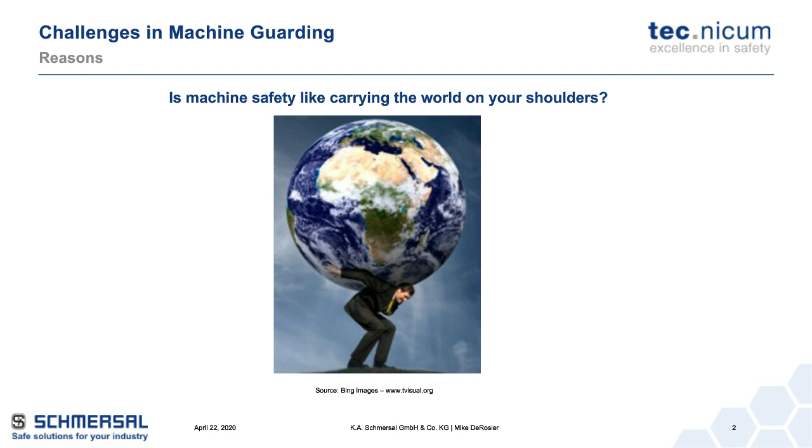I wanted to talk about each one of these, to really make that statement that ignorance is bliss. And I'm sure many of you have heard that just in life, ignorance is bliss. So if I don't know about it, then I don't need to do anything about it, because not knowing, there's nothing to do. I can plead ignorance. I didn't know any better.

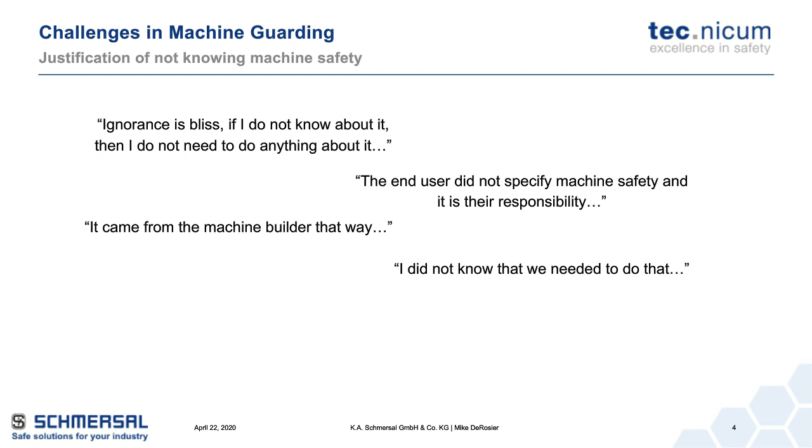And just because an end user may be quoting out a custom machine against 3 other manufacturers doesn't mean that you should forget machine safety in that scope of supply, so you're comparing apples to apples, for example. I didn't know we needed to do that. Well, again, it comes back down to the education. But ultimately what you find with all these, there are things that people say and come up with reasons why they haven't done machine guarding. But the bottom line is we need to protect people from serious harm and fatality.

That's easy to say. It's certainly not easy to do. So we can't justify not doing something on machine guarding just because we didn't know. We learn, we figure out what we can do, and find that balance between machine guarding and productivity.

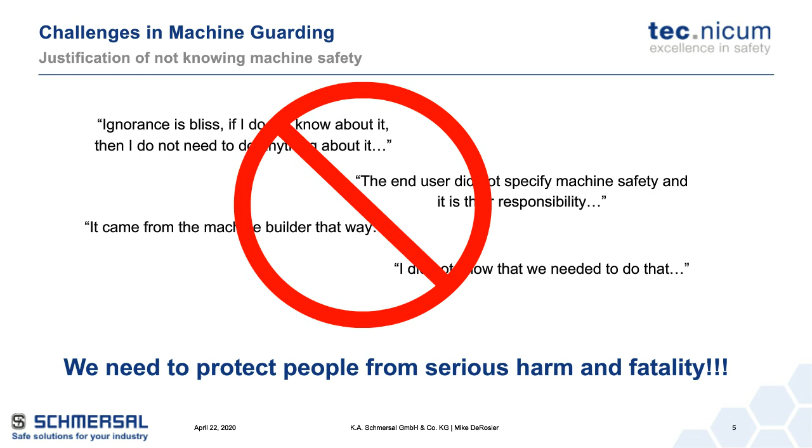Next one in that bullet points was the machine wasn't designed for safety. And this is real. This is what's out there. Whether a machine is 40 years old or 60 years old, there are machines out there that are still performing their job function as they did when they were originally designed. But way back when, the machine was designed purely for productivity and not for protection of people. It was done to put out a product or a process. As a result, machine safety never came into the consideration.

Just because it may still function doesn't make it safe for people to work around. So how do you actually develop guarding to work around that? It may be adding controls. It may be adding a standalone motor with safety controls. From there, you might be able to add guarding around that. You may be able to put light curtains.

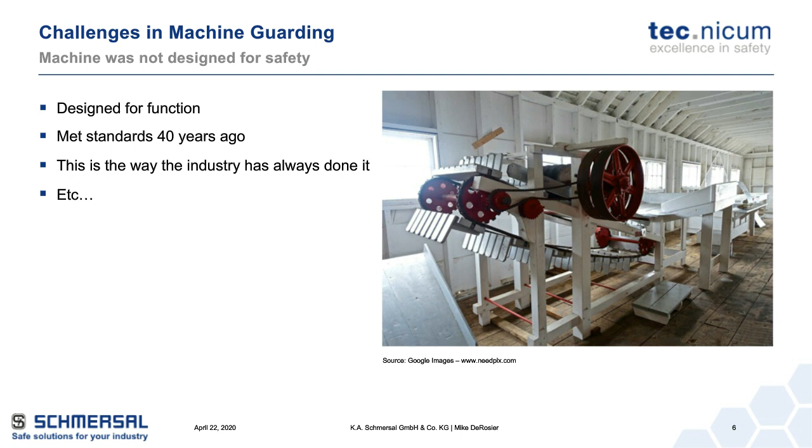But what does it really stem from? Goes back to that educational piece, that knowledge. Knowledge is power. But the fact that this is the way it's always been done becomes an acceptable practice doesn't come in as justification or reasons to not put guarding on a machine. If this machine can seriously hurt or kill somebody, we have to try to find a way to guard that. And again, easy to say, not easy to do. So we're going to go through those steps of what to do and how to do that after we go over some of the reasons that you see or hear.

Another big one is the lack of resources. Not having the personnel to be able to do that, not having your engineering, whether it be internal or external resources to be able to do this.

Somebody has to look at it. They have to come up with a concept. You have to look at risk assessment. What do you need to do? How do you need to go about doing it? How do you design it? Who's designing it? Are you fabricating it?

Are you using a fabrication shop, a sheet metal shop for a guard? Somebody does aluminum extrusion, wire, steel mesh fencing. Who's actually doing that? Who's responsible for it? Is it your own internal maintenance people? Well, maintenance has a heavy job load as it is. They may not have the time or the resources within that department to do it. Do they have the knowledge in machine guarding to get you exactly what you need?

Some facilities have that capability. Others do not. So where do you find those resources? Well, if you don't have them internally, if you can't set that priority, you need to look at external resources to help you, whether it's external engineering companies, whether it's external integrators that work with machine safety to help you along with that process.

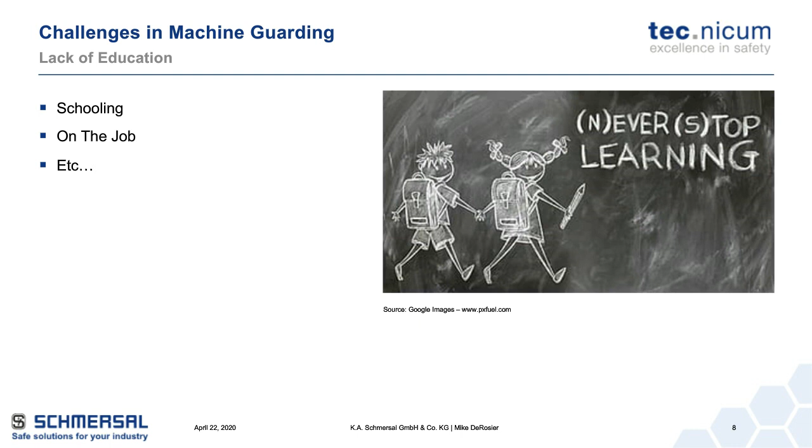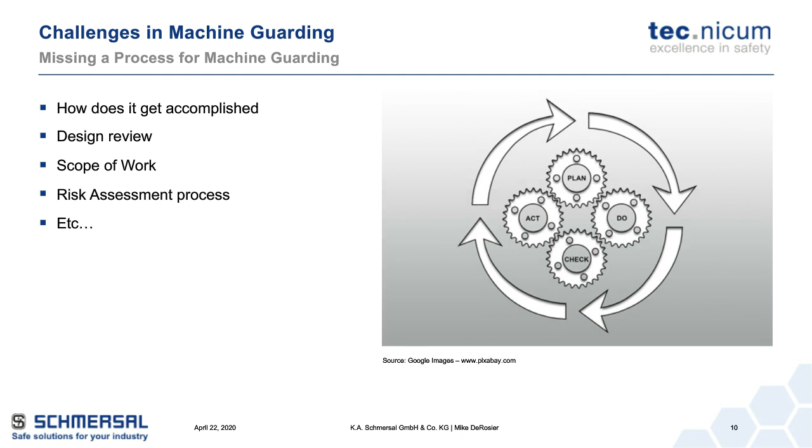The next one, following up from the last slide, is the risk assessment. So many times you may ask, where's the risk assessment? Show me what your risk assessment says. And then you get, well, we never did a risk assessment. Okay, how do you know what you need guarding for if you don't know what the risks are?

What are the hazards on the machine? What's the quantification process, and what do the numbers really mean? We'll talk a little bit more about risk assessment in a few slides later in the presentation.

But knowing or determining where it's acceptable—there's risk in everything we do in life, not just working around machines. You can't guard from everything, but where is it acceptable at that point in time? Rolling back into machine guarding, it's the same thing: there are certain risks where the odds of it happening and the severity of harm are so low that it's handled with process, procedures, and training.

There are other risks that, man, this can take off your finger, and they're present all the time—we have to effectively guard this. How do we go about doing it? Where's the priority? That's where the quantification method is going to get you.

But knowing and understanding the hazards and getting a risk analysis, and then ultimately a risk assessment to get a solution in place, is what's important in the process, because you need to understand where you're at and where you need to get to, to really determine what guarding measures need to be put into place on the machine.

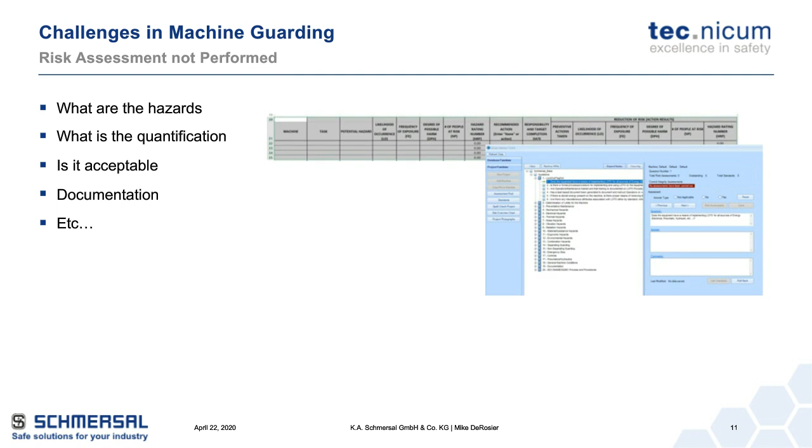Next one is culture. To me, this is probably one of the most difficult things to change in anything you do in any organization - changing culture, changing human nature to think. If you're in a facility where people don't believe in the guarding, that's a challenge because they'll find ways to make sure the guarding doesn't work. You have to change that culture.

Just because it's always been done that way, that's just the nature of that machine, we've always worked with it this specific way - that doesn't make it acceptable, but it makes it a challenge on overcoming that culture. Hey, nobody's ever been hurt on this particular machine, we don't need guarding. Well, just because nobody has never been hurt doesn't mean nobody will ever get hurt on that machine. It makes a big difference.

You can have areas where you get people refusing to change. Well, what that means is you need to have management involved with this, and it has to come from top down. Management has to believe in protecting people and doing that way, enforcing those changes and causing repercussion - meaning whether it's immediate removal from the area, maybe your company policy is a 3-strike rule. Hey, first you get warned, next you get sent home for the day.

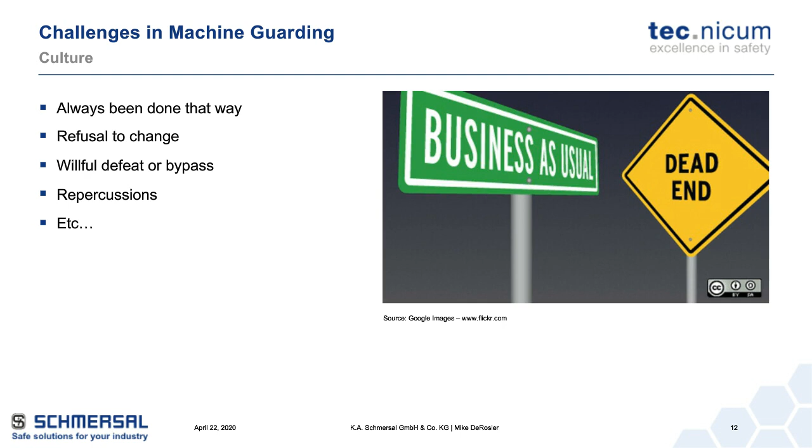So with overcoming all of those challenges, there's a lot of different ways to look at it, and what we laid out here is looking at - I broke it down into 5 steps as part of your process. First one is coming up with a strategic plan. That's where you're starting. Just going gung-ho, loving the energy to do it and wanting to protect people, but it's not going to be successful if you don't start with your strategic plan, meaning what corporate policies are in place, what standards, what government regulations.

They're going to vary. For example, just in the U.S., you have OSHA as our governing body. There's certain standards - there's national OSHA or federal OSHA, but then we have states that have their own OSHA guidelines. There is a minimum to meet federal, but they may take it a little bit above as well in certain areas. We have in Canada, specifically in Ontario, the Ministry of Labor.

We worry about different government agencies in other countries and what the local municipality and government regulations are, understanding what they are needed in those specific regions. It's one thing to take it above, you can never take it lower than what local regions are.

So knowing what that strategic plan is, then also building on that is training. What training needs to be done? Who needs to be trained? We're going to break through each one of these over the next 5 slides as well.

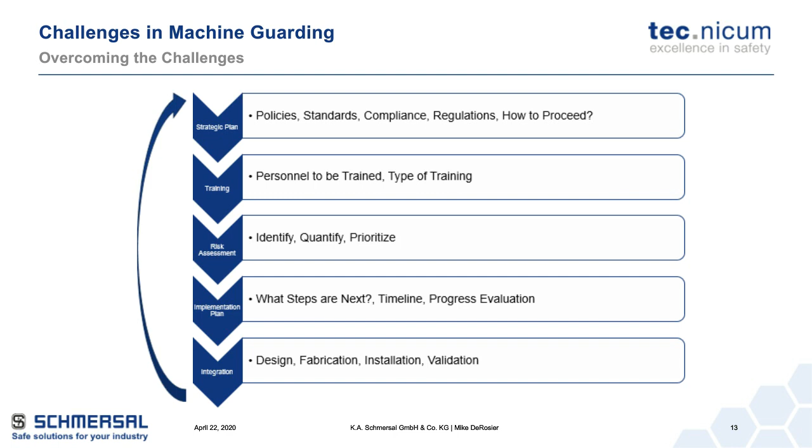The next thing we're going to talk about now is breaking down each one of those points. So the strategic planning.

Understanding, as we mentioned, the local government regulations. But that's not the only thing. A lot of government regulations may also refer back to industry consensus standards. Why? There's going to be a lot more details in the industry consensus standards because, as the name talks about, industry consensus, that specific industry.

So you have people from suppliers, you have people from the end users, you have the equipment manufacturers, representatives that have come together in committees to help generate and write this standard that makes it practical from everybody's point of view and perspective to make it easy. It's not weighted that, hey, this is all suppliers just trying to push their product, or this is all machine builders trying to avoid having to put any guarding on a machine. No, it's a consensus.

These people come together to talk out and figure out what's the best way to approach that specific industry or that specific machine. Maybe your company has corporate machine guarding standards. Are they up to date? Are they written 20 years ago but really don't accommodate the current industry consensus standards or current government regulations?

And looking at that. But then that comes back to now establishing that process for machine guarding. Who's doing it, doing the review as a result.

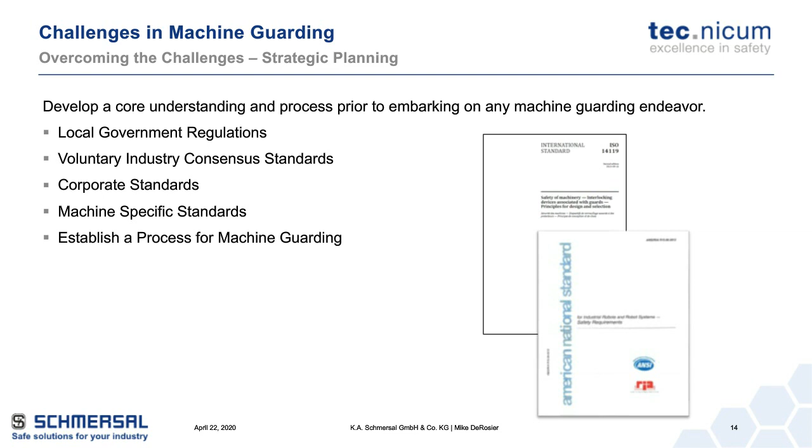So if you look at EHS people, one of the common problems we see out there is because somebody has EHS or HSE in their title, the people they work with think they're experts on everything. It's too difficult to be an expert on everything, and machine guarding is no different.

So EHS people need that education, and they may have it on the machine safety side, but part of what to train on is not just the need for safety, but how to operate the equipment. You can't have defensive walls built up where you have EHS people on one side and operations on another, banging their heads saying, you must guard it. I can't guard it because I can't produce the product. That doesn't work either. Break down those communications.

So part of that education is educating on the process, how you currently run the equipment, so you can come up with, okay, now that I understand that, how do we guard it?

But then that comes back down to training operators. There's a need for safety. We understand it was never guarded effectively to begin with. We're not trying to make your lives more difficult, but this is the reason for it. We want you going home at the end of the day with your families. We don't want you getting sent to a hospital or worse.

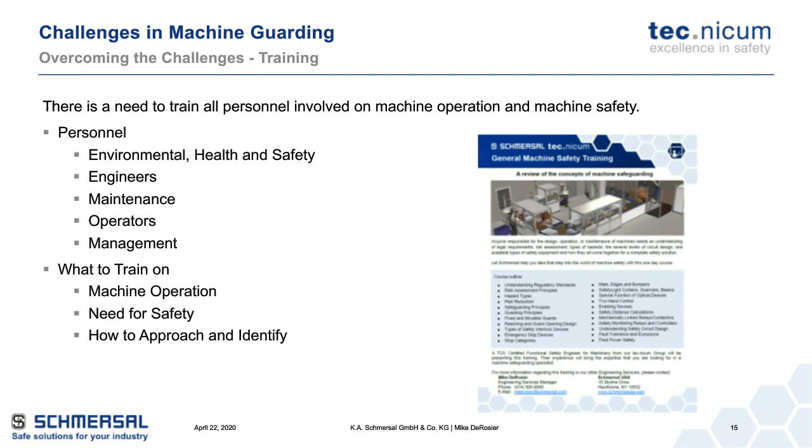Next one, we talked about risk assessment, but I want to go into more detail with this. I've seen some very good risk assessments out there. I've seen some very bad risk assessments that don't give a whole lot of information. You want to evaluate your risk assessment process and look at different things.

One would be identify your hazards naturally. Everybody looks at that, but don't just look at the visible. Look at what you can't see. Look on the ground, lay on the ground. Can you reach your hand, arm, or leg up underneath the machine and get into a hazard point? You may not be able to physically see them until you lay on the ground and see a chain and sprocket completely open on the bottom.

Somebody drops something on the floor and they reach up. Next thing you know, they just lost fingers in the machine because it wasn't effectively guarded. Don't stop at the visible. Look at the things that you can't see.

That also includes evaluating controls. You can put some great guarding on a machine that effectively protects people, but if you don't have the right switches and they're not wired in properly, or the e-stop is wired into a standard PLC input and doesn't remove the hazards of the machine, you can have simple failures that still lead to an unsafe condition. Evaluate those controls to understand what you have and if anything is needed. Maybe you have a proper Category 3 control reliable circuit that's required per the risk assessment, but until you evaluate that, you don't know.

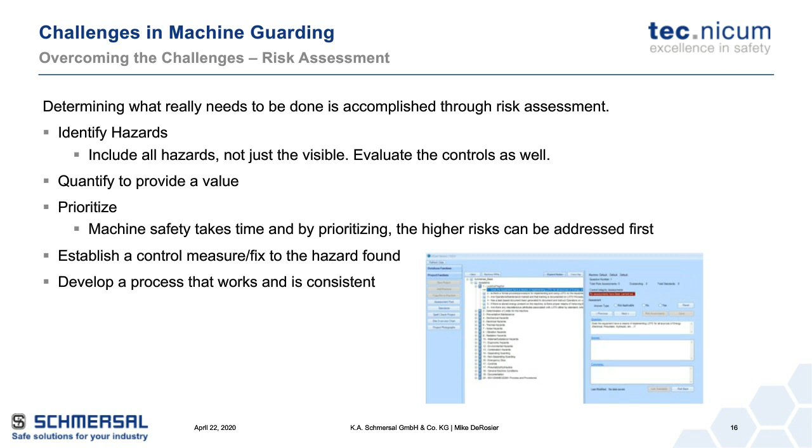The implementation plan, we talked about this. It's developing what you need to do, how you're going to go about doing it in the design, but establishing a realistic timeline. Not just a timeline, what's realistic? Knowing that you have all these hazards to take care of, saying we're going to have this done by the end of the month is not realistic. Maybe it's a 1 year, 2 year, 3 year process, and you're going to start working with the highest priorities and work your way down as a result.

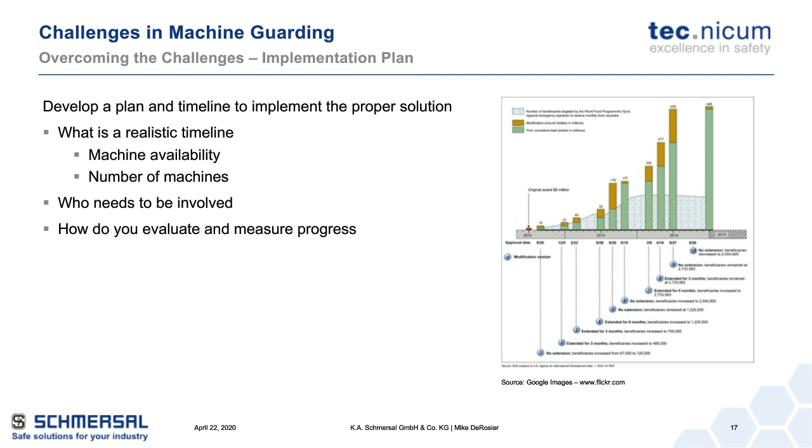The last one being the integration. To me, one of the most important points here is make sure you balance safety and productivity. You cannot sacrifice one for the other.

You cannot say it can't be guarded. It needs to be guarded. The question is, how do you guard it? But if that guarding completely stops you from producing, that doesn't work either. You just have a big piece of metal that does nothing for you at that point in time.

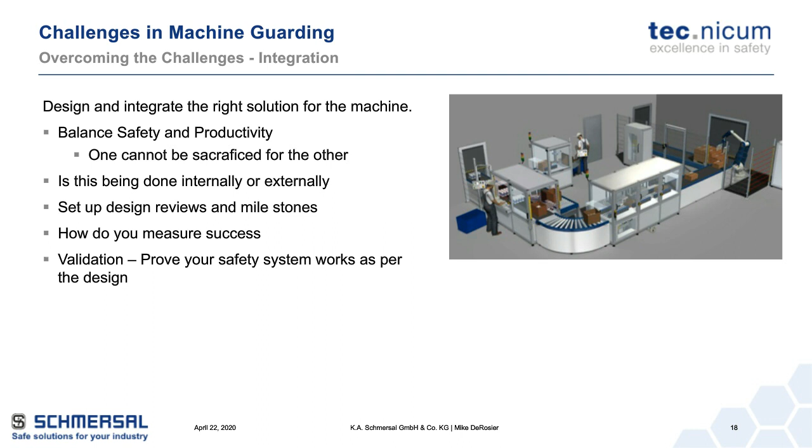Where's that balance? Where are your resources? Who's doing it, internal or external? Make sure you review the designs before guarding is just thrown up. Understand where access points are. Validate it, prove it out that it works. And that all comes down to the hierarchy.

This was taken from ANSI B11.0, but there are a lot of different charts and methods in different standards doing a lot of the same type of scenario. It's a hierarchy: first you try to eliminate the hazard, then engineer a solution, then add administrative controls with awareness, warning signs, making sure people are trained on safe operation, and PPE. What's most preferred versus least is because of what's most effective.

If we can eliminate the hazard, it's gone. If we can't eliminate it, how do we effectively protect people from serious harm? That's what this chart is trying to get to.

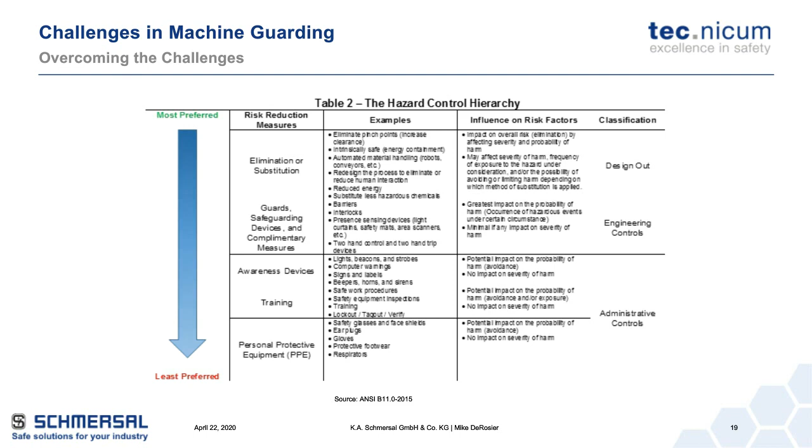This was the original list of reasons for the challenges of machine guarding, and we went through each one. Continuing with that, if we look at justification of not knowing, we can't accept that as a practice. It comes back to education—learn it and put that safe culture into place. These aren't all-encompassing, but they're some points that can help you overcome those challenges by implementing these concepts and ideas.

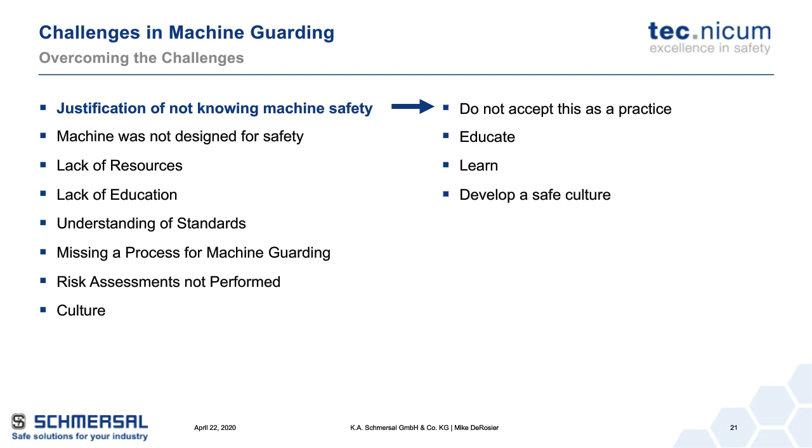Not designed for safety, an existing piece of equipment—make sure you review how it needs to operate. Look at and review designs of guarding. How can we effectively guard it while still being productive? It might be a combination of different concepts, thoughts, and ideas to develop and implement a great solution that is productive.

It may require a machine redesign. Just because we know the function of the machine, we may have to redesign it and make changes before we can implement the guarding, to make sure we can effectively guard it and still be productive.

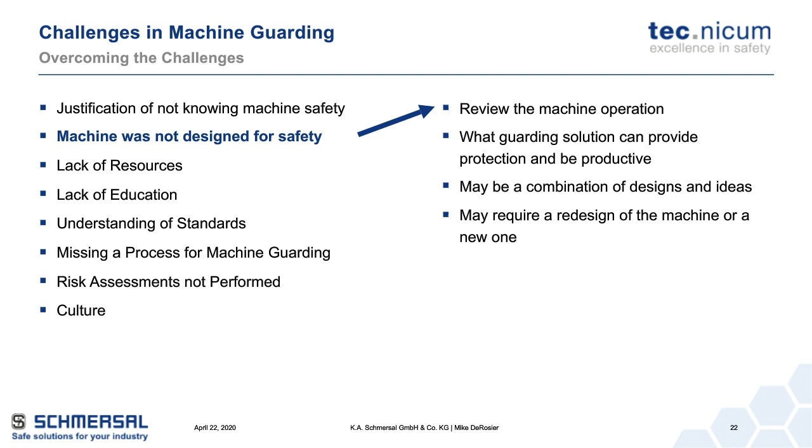The resources help prioritize. If you're using internal resources, meaning engineers working on specific projects, is that project a higher priority than machine guarding? Can machine guarding move up higher on the priority list? If it can't, that's understandable because you have a limited number of resources. Investigate external resources—are they competent in machine safety the way you need them to be?

Funding, as I mentioned, is a big issue. Do you get the funding? What's the cost of safety? Ultimately it comes down to the cost of an injury. You may spend thousands, hundreds of thousands, or even millions on machine safety, but if somebody gets seriously hurt because that money wasn't spent, how much does that cost the company? You can't just magically make money appear overnight. Part of the process takes time because you may have limited funding, but your risk assessment helps you prioritize and move down the list.

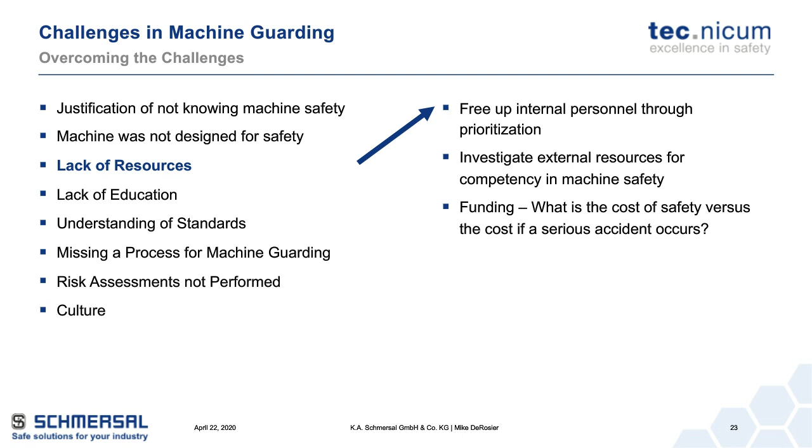The education factor—how do you expand that? There could be online tools, webinars just like this one, to help break down the process a little more, or full day training sessions specific to machine safety. There are different resources out there, but understanding how your machine works is going to help you develop a good guarding solution.

Understanding of the standards comes back to knowing what standards are applicable, finding that out, and working on your interpretation of that. But that may also come down to utilizing your external resources to help you with that.

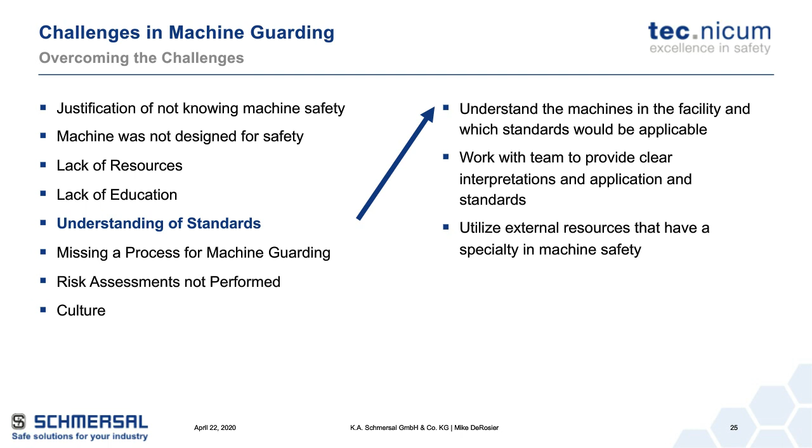The process—if you're missing it completely, get a process in place. That's going to show some progress and make things better in your workplace. Find out what you're missing, what you have to fill the gaps with as a result. Put that into place, but be strategic. You can get so blocked in by constantly trying to rehash and make the process perfect that it takes you a year or two to put an effective process in place.

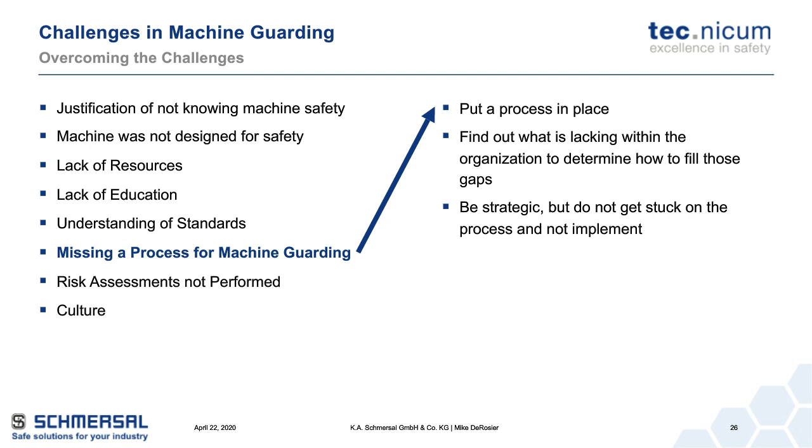Well, you just lost a year or two of machine guarding, and people may be getting hurt as a result. Don't let trying to perfect it stop you from putting something in place. It's going to be a living document, and you work with it and improve it as you go along. Get the risk assessment done. Understand where your hazards are, what you need to do, define your acceptable level of risk, and prioritize it. And then the last point is the culture at that point in time. It can be difficult to change, but it takes a good amount of time. You have to have management buy-in. If management doesn't buy in, it's hard to change that culture. It has to be enforced. You have to have the repercussions, or it's going to make it very difficult to have an effective machine guarding program if management isn't driving this with you.

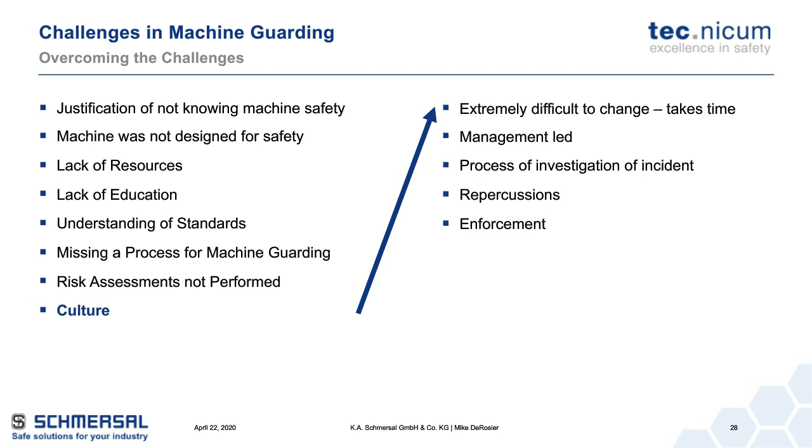Now, ultimately, I think what we can do is put this into three simple buckets: education, assess your risk, develop and implement a solution. You can break these down into further bullet points and values, but you can simply put this into these three steps. Education is so important. Getting that machine guarding knowledge, getting what to do and how to work with a machine and what's going to be effective, that's what's going to really build on everything else. That's your foundation, getting the knowledge. Knowledge is power.

That's what's going to make you strong on putting an effective machine guarding program in place, which then leads into, before you start throwing a whole bunch of designs and putting things in like what I call Band-Aid guards, you assess the risk. You perform a risk analysis, do the full assessment, and understand what the hazards are, what needs to be done to fix those hazards, and where your priorities are, which then gets you into that last step of developing and implementing a solution. Who's doing the design? How's it being done, internal or external resources? Where's the fabrication being done? What guarding do you need? And you implement it. What do you need to do to implement it and make it effective?